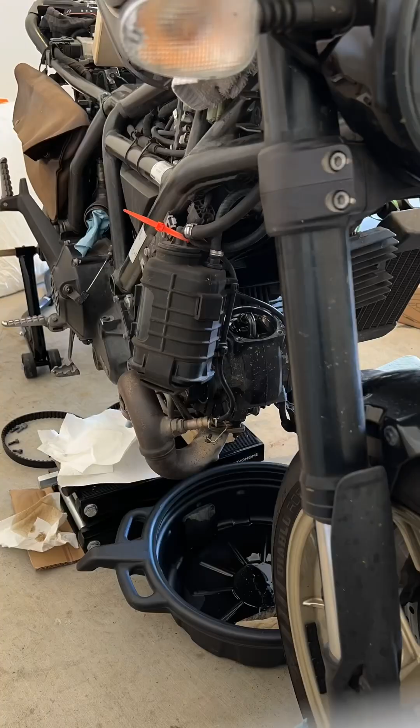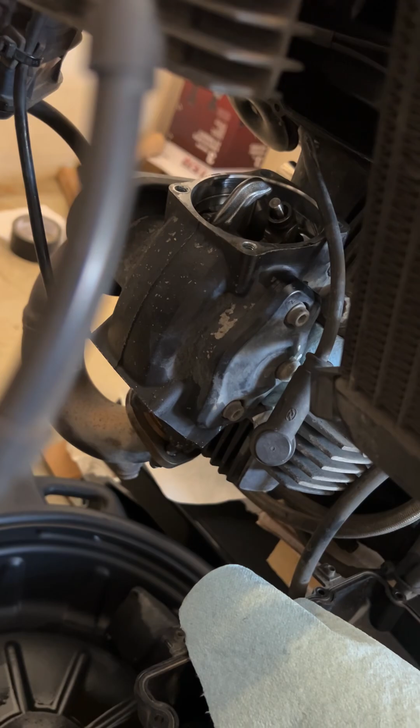Just to further explain what I did there, I was rotating the engine, finding the spot where I can move the opening rocker arm to the left in order to take the top opening shim off. I've done so, and then I just rotated it a bit more the opposite direction, clockwise,

to get the valve in a place where it can be pushed down, and pushed down enough so that when I actually push down on this rocker arm, I can take this closing shim off. You can see the half rings inside there.

So what you need to do is push this closing rocker arm down, and then you have to do a few things. Hold the valve stem up so that it doesn't fall down into the chamber, and then while you're pushing this down, push the closing shim right here down as well to expose the half rings.

Use the magnetic puller to grab the half rings off, and then the shim should slide out upwards off of the valve stem. But the valve stem will then have nothing holding it up, so it could fall down to the chamber, which would be really bad.

So you need something holding it, which I'm going to figure out the best solution for, because there's a few ways to do it, but we have very limited space here, so we want to do it whichever way is best for the space allotted.

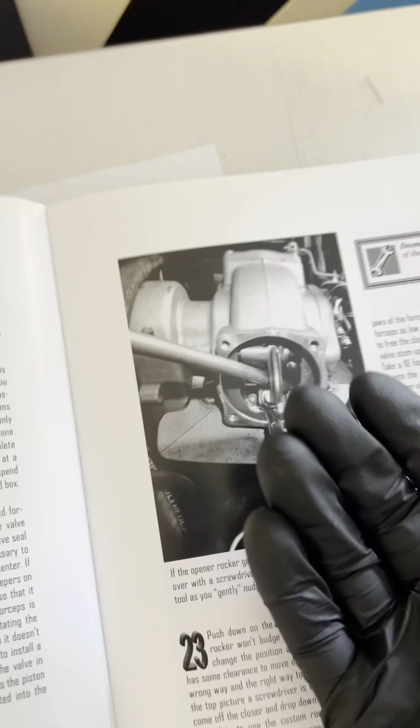Okay, so the method that Desmo Times says to use is by using these forceps, he calls them, basically like scissors, to grab the valve stem so that it's staying the most upright it can while you are lowering the rocker arm, taking the closer shim off and the collets and all that.

So to keep it up so that while you're pushing the rocker arm down, you're not losing that clearance that you're trying to get, and also to prevent it from falling into the chamber. So I don't really see a good way to use forceps in a place like this, because I can't go that much back, and there's really no way to get at it from the front.

I mean, maybe from the side if anything, but that's got to be a really perfectly shaped pair of forceps. So I don't know, it seems like that would be a little hard. I also don't want to use something like pliers like this that have serrated ends and hold it on the stem very hard, because I don't want to damage the valve stem.

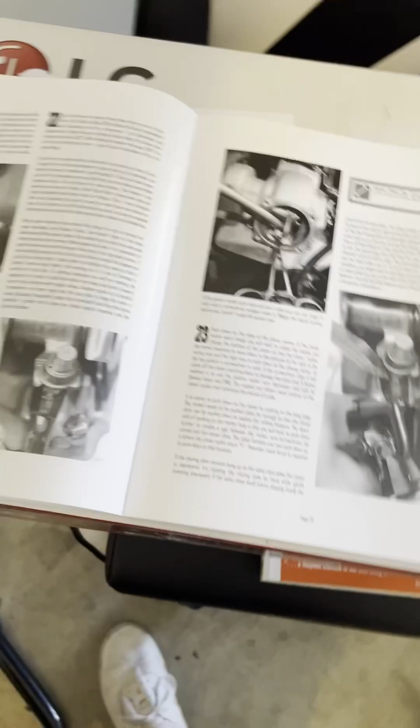So what I'm thinking is of using basically a magnet tool. I'm gonna give this a shot and see if it works. It will clearly grab the valve stem because it's made of metal and it's magnetic, but I also need this to get the collets off as I'm taking the closing shim off.

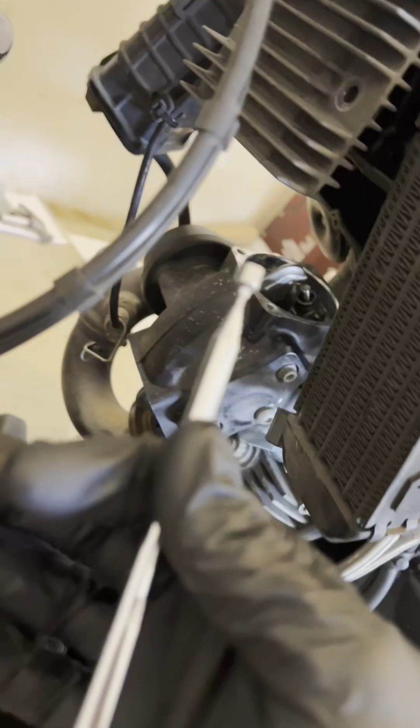So I'm gonna get another one of these and have one person holding the valve stem, and hopefully it's just a strong enough magnet to do that, to keep it from falling down. And if not, then we're gonna have another problem on our hands, but I'm gonna give that a shot first and see how it goes.

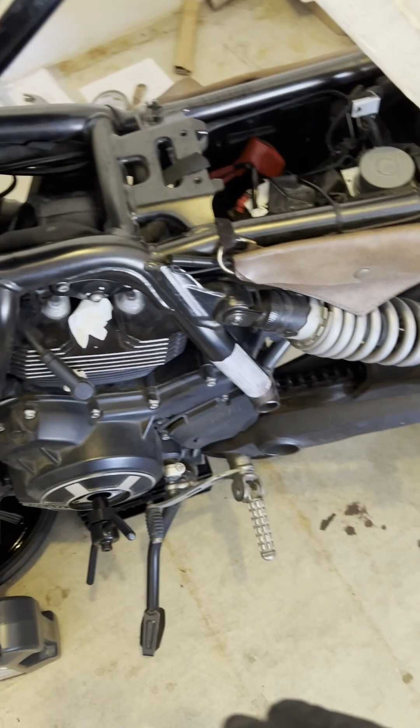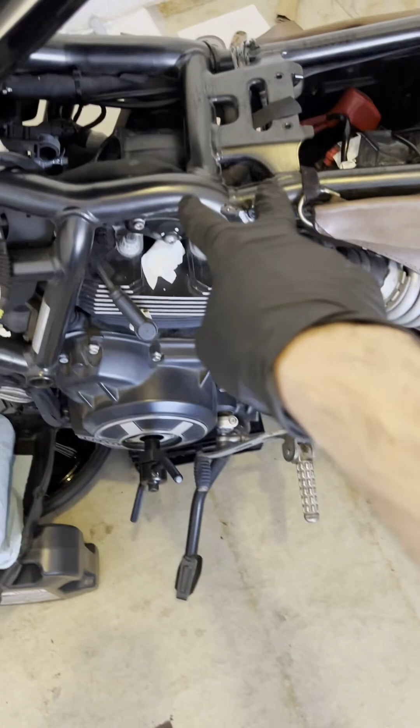So anyways, while I wait to get another magnet tool, I'm going to start working on the opening shims across the board, since a lot of those need to be changed on the horizontal exhaust side and the vertical intake and exhaust. So start doing that first and then taking some measurements and see where we're at.

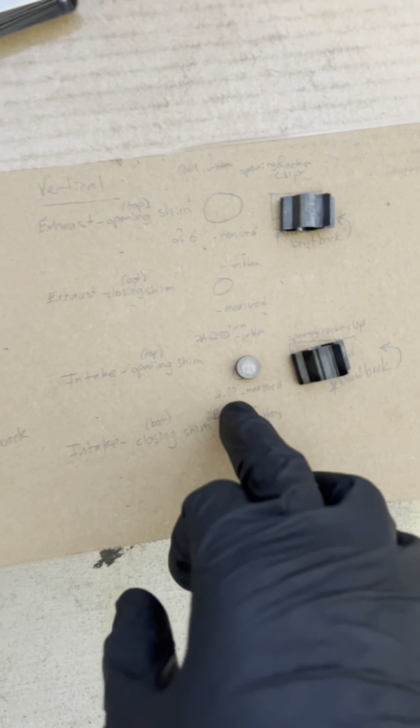All right, so we're gonna be working on the vertical intake side opening shim. I already got the rocker arm off and the old shim off. So the old one was a 2.9 and that was not leaving enough of a gap. So we're gonna try 2.85 first and measure, and then 2.8 and just see which one's better. I got both options right here, the 2.85 and 2.8.

I'm first going to measure these, make sure that they're what they say they are, with my calipers. And then once we put it in, we got to get it at top dead center and just do that whole process again to measure properly. So that'll be all in a time lapse, but I'll be doing everything that I just said.

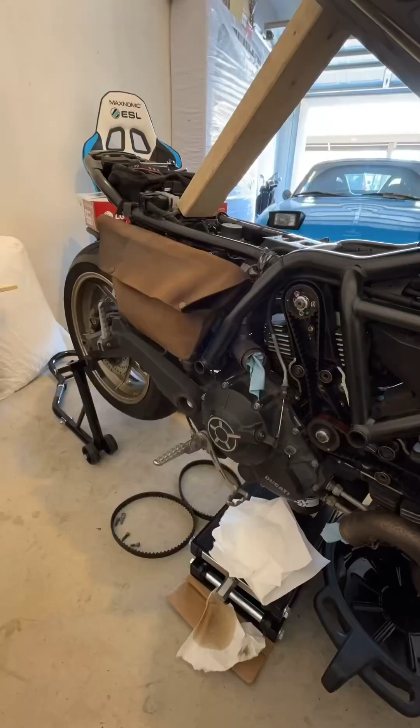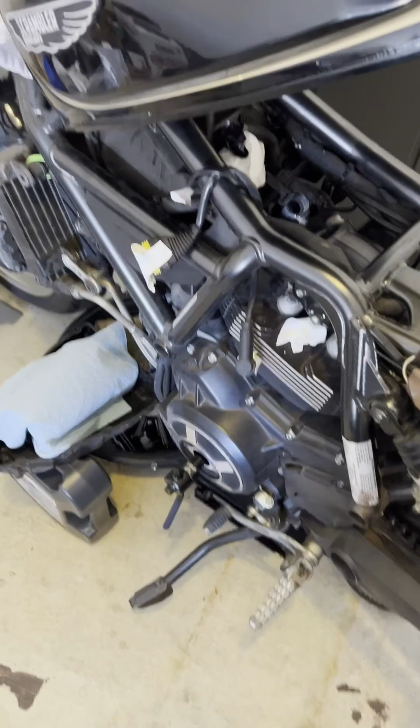So it turns out I actually did my math wrong when ordering for this exact shim. I got two smaller sizes instead of two bigger ones, and I needed two bigger ones. So that's unfortunate, and I didn't even get that size with anything else. So I'll just have to order another one and pay the shipping, but it is what it is. It's my error. So I'll go to the exhaust vertical and do that one now instead, since that one was just wrong.

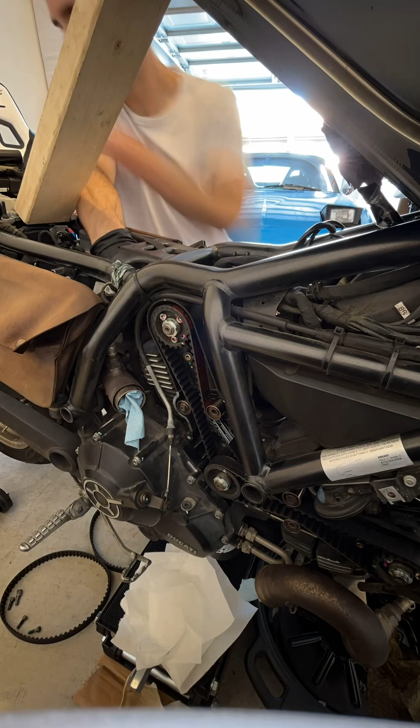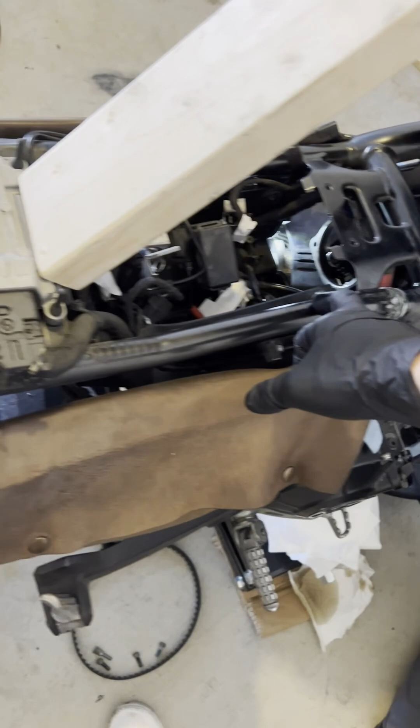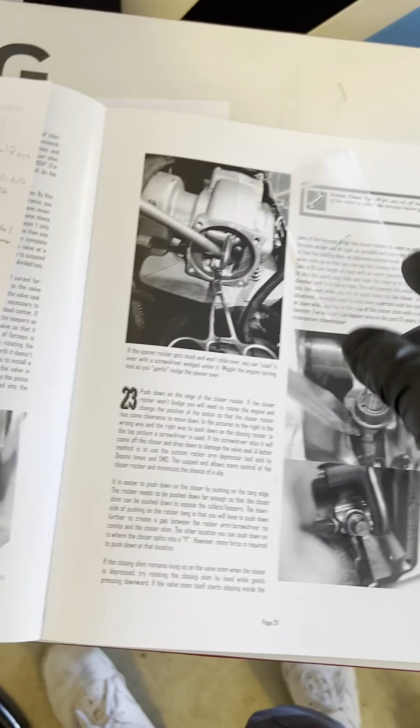So we've run into a similar issue with the exhaust side, the opening shims that I got. It was a 2.6, although it could have been a 2.55 because the caliper does kind of round up. So it's possible it's a 2.55. So to prevent that, I got a 2.55, 2.50, and 2.45. And the 2.45 only allows a 0.04 millimeter feeler gauge through there. So we still have about maybe 0.05 to go.

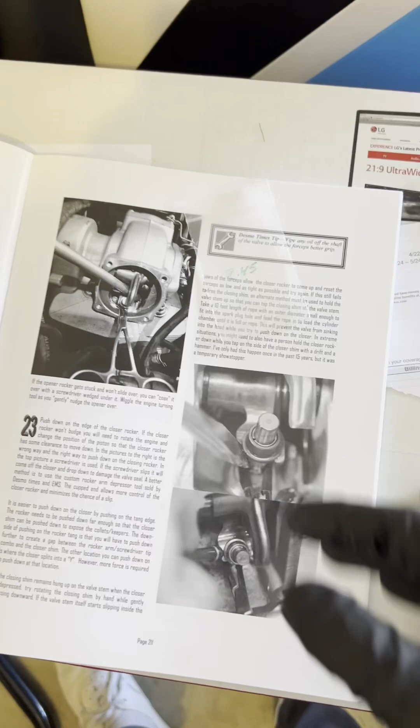So realistically, I need a 2.4 and a 2.35 to check for sure. And I don't have that. And of course, I didn't buy any that small. So once again, just out of luck. I'm gonna have to order more, but we'll just move on to the next one. It's just unfortunate that both of these were strikeouts, but it is what it is.

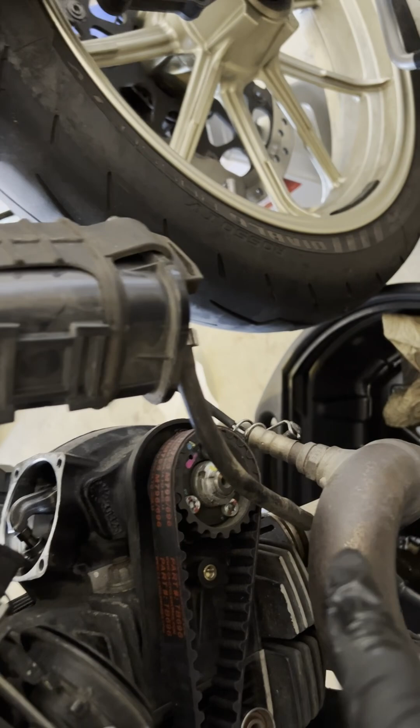All right, moving on to the only other opening shim we have to adjust, which is the exhaust side of the horizontal head. The intake side was fine. We don't need to adjust that one. That one was perfect. So just the exhaust. We'll see if we got the right size for that one. Okay, we have a winner.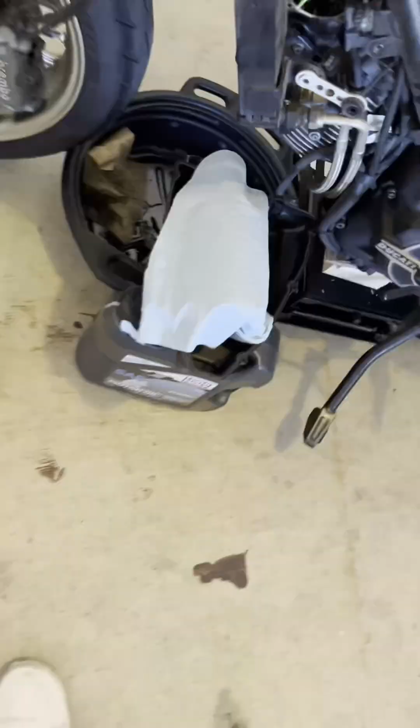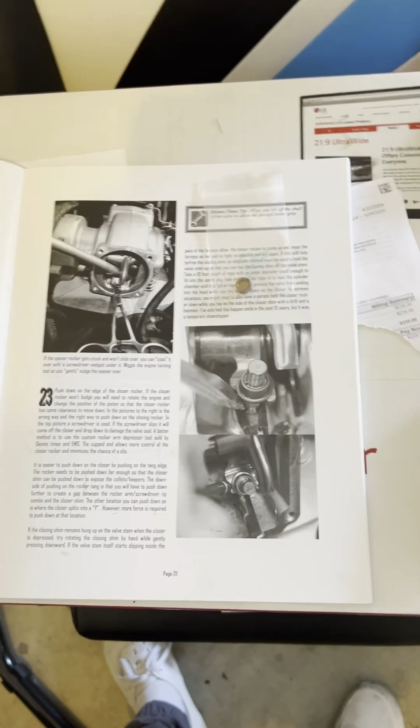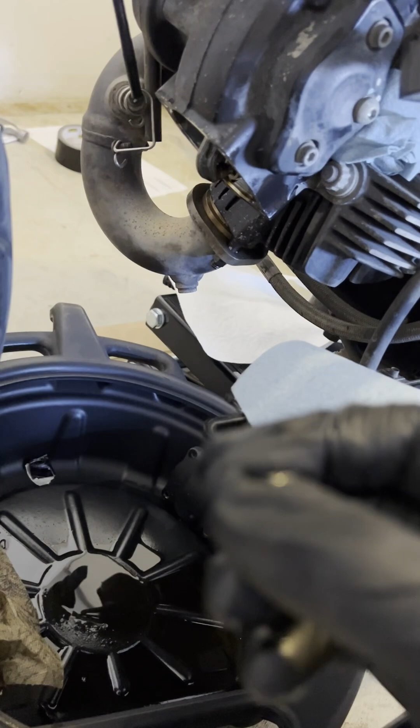Finally. So for the horizontal exhaust opening shim, the 2.55 worked beautifully. I tried the 2.5 and the 2.6, and the 2.55 was by far the best. And I was noticing while measuring, it could be maybe ever so slightly smaller, and I think that's fine. Just as long as you're within spec, which I am in this case. I tried the 2.55, the 2.5, the 2.6, and the 2.55 fit the best. So that's the one I'm going to go with.

If you want to get exact measurements, like to exactly 0.01 millimeters, or is it 0.1 millimeters?

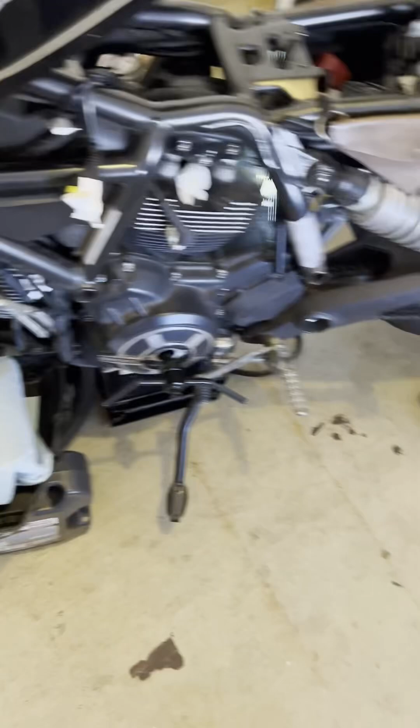Like it says, if you want to get exactly to 0.1, you can sand shims. That's one thing that they mention in the Desmo Times book. It's not necessarily recommended, I would say, and also it's kind of finicky because once you sand it too far, then you're screwed. So I'm not going to bother with that.

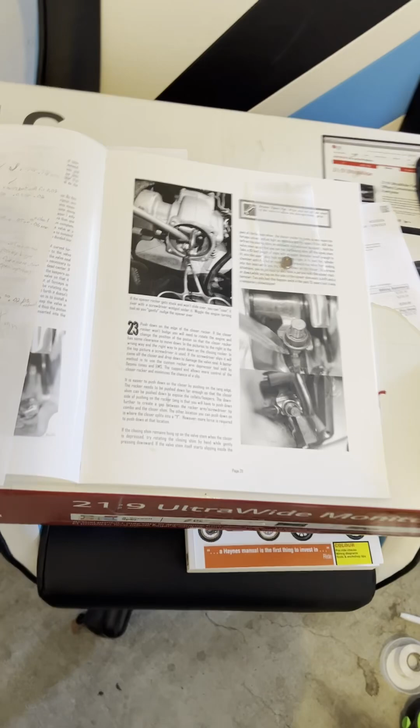If you're doing track use with your bike often and it needed to be exact at 0.1, then yeah, it's probably worth it. But as long as I'm within the 0.1 to 0.15 range, which I am, I'm good. So that was the 2.55. That's a keeper.

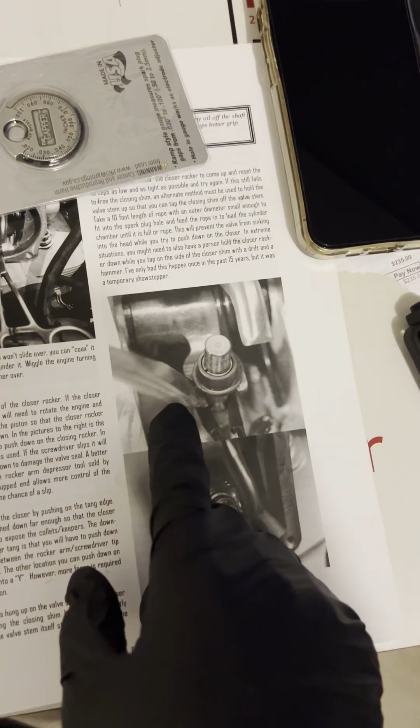So now that I got an extra pair of hands with Cindy helping me, I'm gonna try to take off this closing shim on the horizontal intake side. Let me show you on the diagram. We have to first get the engine to a position where we can push the valve down significantly.

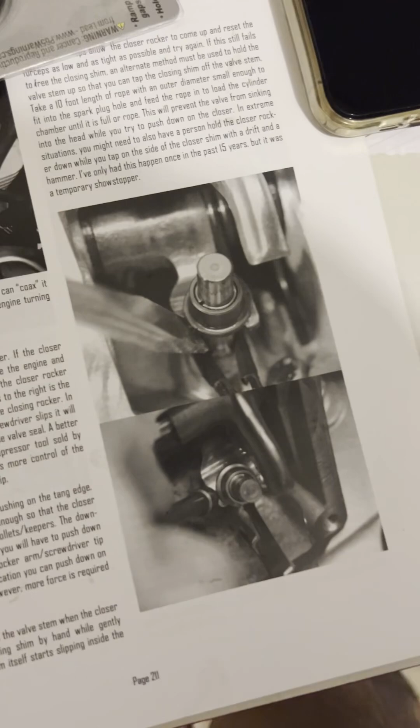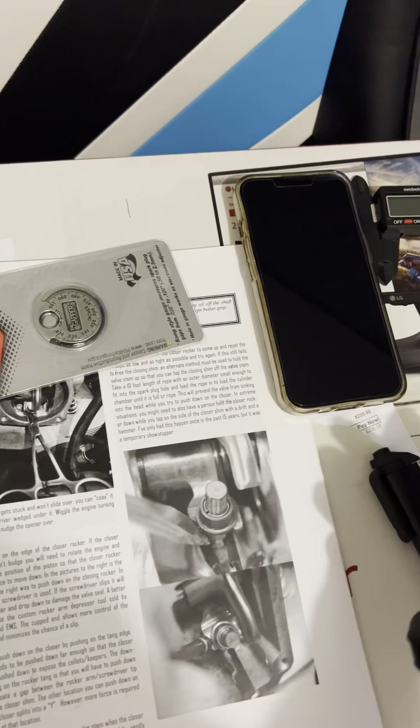It's not at top dead center, it's at a different spot, basically where the valve would be open, so we can push it down, then push the rocker arm down while pushing the closing shim down and magneting the top of the valve stem to hold it up, exposing the half rings or the collets, get those off, and then take the shim off. But holding the magnet on the valve stem so it doesn't fall in.

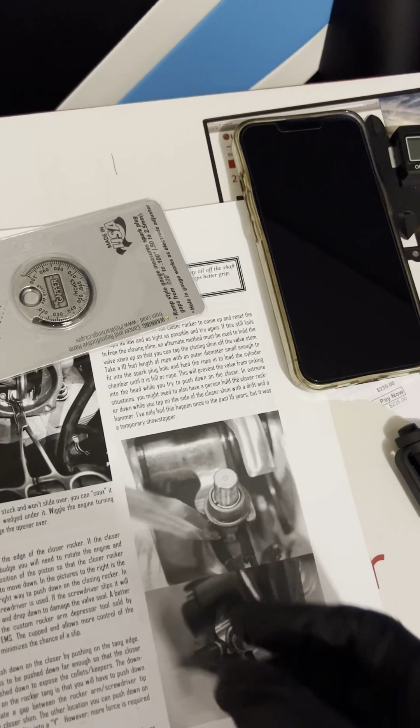And then putting the new collets on and the new shim, and then measuring to see if that's the right fit. So we're going to try to do that and see if it works.

It's probably hard to tell from the video, but that was awful. So hard to do, but we finally got both collets off and the shim off. What we did was first get the valve in a position where it goes down, and in that position you can push the closing rocker arm down, grab the collets off, and then the shim wasn't coming off, it was getting stuck on the opening rocker arm repeatedly.

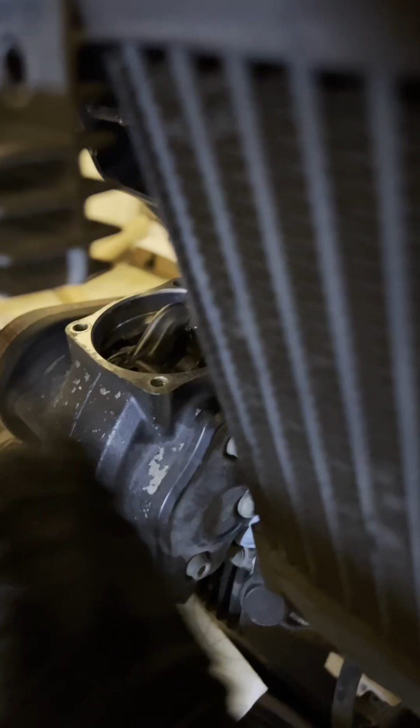So we had to basically push everything down to get the shim off, and somehow, by the Lord's grace, the valve just didn't fall in. And now I got it into a place where it can't. It's hitting, I think, either the other valve or something, so it won't fall in. But it is a pain to get everything on. So we're going to try to put the right size back on with new collets and remeasure, and hope that's good.

Okay, so we had a 2.75 on the horizontal intake closing shim. We're gonna put 2 of these new collets, half rings, and a 2.8 instead of the 2.75, because we were looking at about a 0.05 to 0.06 difference. So hopefully we can make the gap basically marginal, just so that it moves but less than 0.05, because right now it was at 0.05 or 0.06, so we're trying to get slightly less than that.

I'll end that video there for now. As you'll see if you continue watching through the rest of the series, a lot of the methods I tried initially turned out to be overly difficult or not the best way to do things, and I came to find that out later. So I ran into a lot of snags, especially with the closing shims, and I'll be highlighting that all the way through. I figured it'd be valuable to show everything that I learned over the course of doing this, instead of just cutting everything out and showing the final video explaining here's the best way to do it.